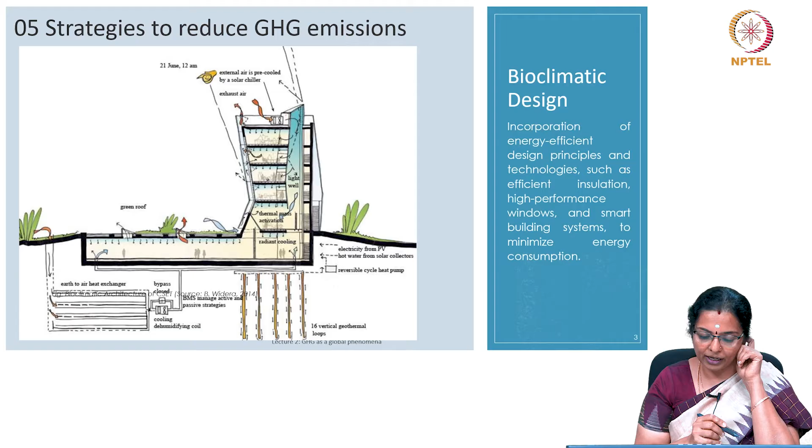One is optimal building orientation. All this we will look at in greater detail later. Natural ventilation. Now let us take the case of this building. If you look at the bioclimatic feature, I have not really projected the orientation, but let us assume that the building is oriented, if this is the building, and then if this is the north, then you can see in this building the western side is very

shorter compared to the north and the south, and we all are aware that radiation along the west is very high. So, if a building is oriented properly, that is what I mean by optimal orientation. Provision for natural ventilation. Here in this building you can see that there is provision for not only natural ventilation but different types in which the ventilation can happen. You have the ventilation along this, you have a shaft

ventilation and so on. Then energy efficient envelope: the design of the envelope itself should be such that the building consumes less energy by virtue of making the indoors comfortable. This approach utilizes many features. One can be orientation, natural ventilation, envelope design to decrease the load on artificial heating and cooling, thereby lowering energy consumption and thereby lowering greenhouse gas emission.

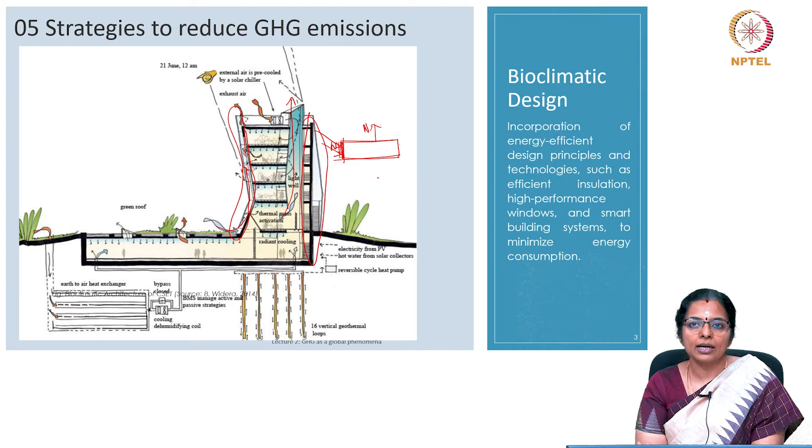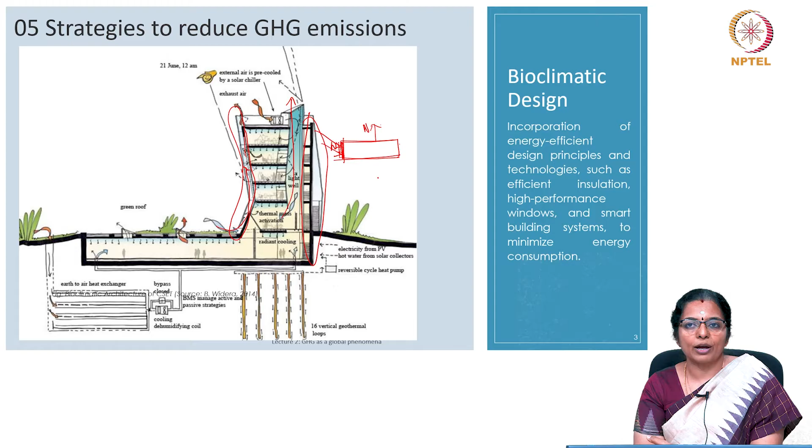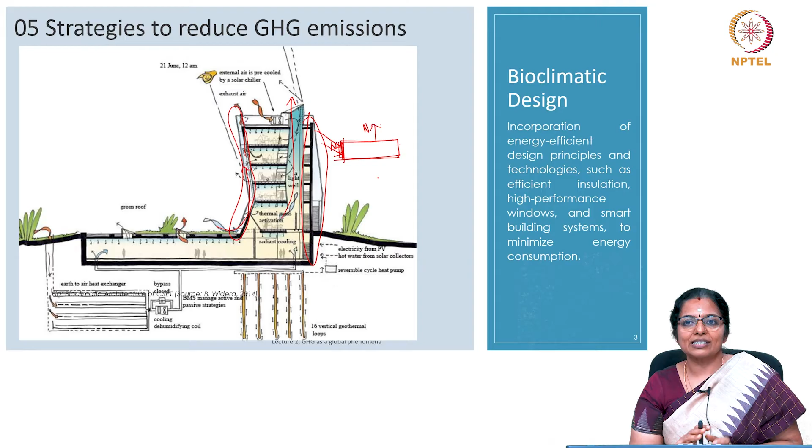Additionally, integration of renewable energy sources like solar panels and wind turbines and other sources of renewable energy, a focus on natural lighting and water conservation practices also enhance the overall environmental sustainability of bioclimatic buildings. In essence, the principles of bioclimatic architecture offer a holistic strategy to create structures that not only prioritize energy efficiency but also contribute substantially to the reduction of greenhouse gas emission.

Now, another strategy that can be used is renewable energy integration. Now, integration of renewable energy can happen in two ways. It can be on-site or off-site. So, renewable energy integration in the building industry involves incorporating sustainable energy sources to power the structure efficiently. Renewable energy integration entails efficient powering of structures by incorporating sustainable sources.

What are the sustainable renewable sources? Solar is one, especially in a tropical country like India. Solar energy is the way to go. Solar panels. We have abundant resources for wind turbines. There are many places in the country where there have been sustained efforts to tap the potential of wind energy.

The on-site clean energy generation reduces reliance on traditional power grids, cutting carbon emissions and promoting environmentally sustainable buildings. The shift not only contributes to a greener and a more sustainable energy mix, but it also aligns itself with global initiatives to combat climate change. Incidentally, that happens.

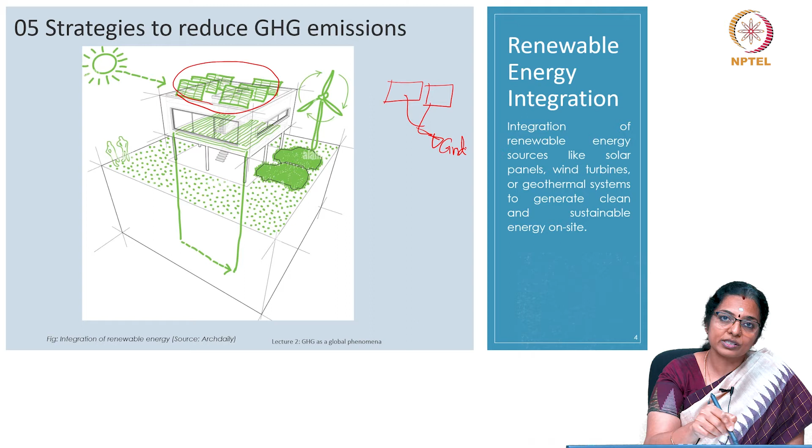So, how can we have this integration? We can have this integration by having solar PVs integrated in the buildings itself. The building itself can host it, or it can be off-site. Off-site meaning there can be solar panels which are not on the site, and the energy that comes from this can be given to the grid, and that energy can be used here in the building. That energy can come back here, or it can remain with the grid also.

That's up to you. Again, wind energy can be off-site. Normally, wind energy is off-site only. It is very difficult to have wind energy on-site, and so on. So, these are the larger strategies.

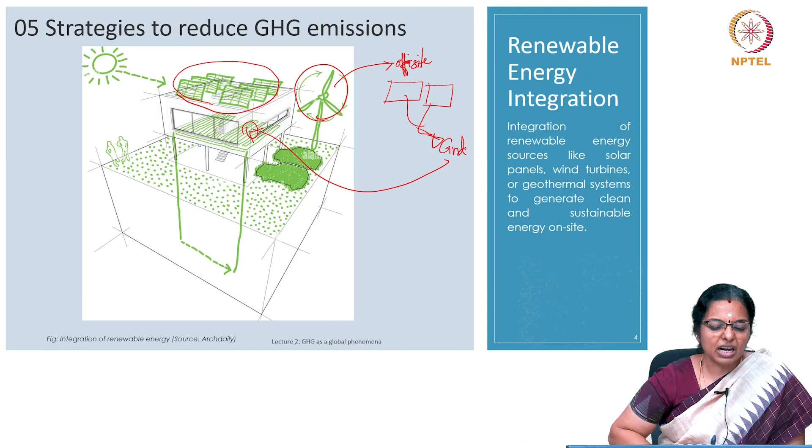Another strategy is trying to get green building certification. There are a number of green building certifications in every country. For India, we follow LEED India, or we also follow what is called GRIHA. So, right now we are having two major certifications. The third could come, which is called the EDGE certification. So, these are largely Indian certifications, LEED India.

At this time, in this class, we are not going to talk of certification, and therefore I am not speaking more on this. But we could have LEED India, GRIHA, EDGE. These are Indian based. All the other things that I am quoting here like BREEAM, CASBEE, there is Passive House, they are all adapted in Europe and the US.

So, of all the categories in all of these green building certifications, every building has to score certain points in some or many of the criteria. So, almost 30 to 35% of the points in any rating system is attributed to energy efficiency. So, it is found that energy efficiency consists of 30 to 35, normally we will keep it as 32% of all the points available on average for the rating systems

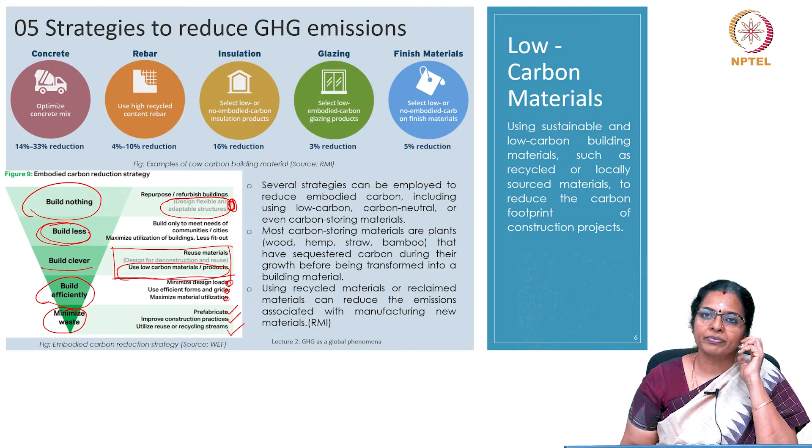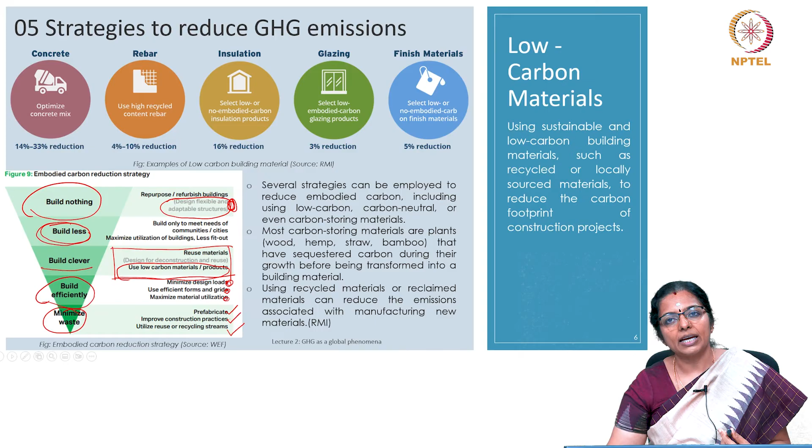GHGs. Glazing, select low embodied carbon glazing products. This can cause a reduction of even up to 3%. Finish materials. So, select low or no embodied carbon finish materials. The kind of carpet, what do you use for carpet? If you are going to have more organic elements in the carpet, it is going to be low carbon, and if you are going to have synthetic materials, the embodied carbon is going to be very high. More embodied carbon, more GHG emission.

The next strategy is the measurement of GHG's impact, which is determined through global warming potential, as we already discussed, and it is expressed in carbon dioxide equivalent. That also we have already seen. Assessing a product's embodied carbon involves a life cycle assessment. What is life cycle assessment? We are going to look at it in great detail, but this life cycle carbon assessment analyzes environmental impacts at each stage of the product's life cycle.

The disclosure of LCA, which is life cycle assessment, results is through environmental product declarations, which are called EPDs, and it offers consumers valuable insights into the environmental footprint of building products. Conducting life cycle assessment also helps us in evaluating a building's environmental impact from the cradle of the building to its demolition, and it considers factors like materials, energy, and end of life disposal.

So, you are not looking at building as a momentary product. You are looking at the consumption of carbon or the emission of GHG right from the raw material production phase, which is nothing but how do you extract the raw material for a particular product, and what all carbon emissions happen at that time.

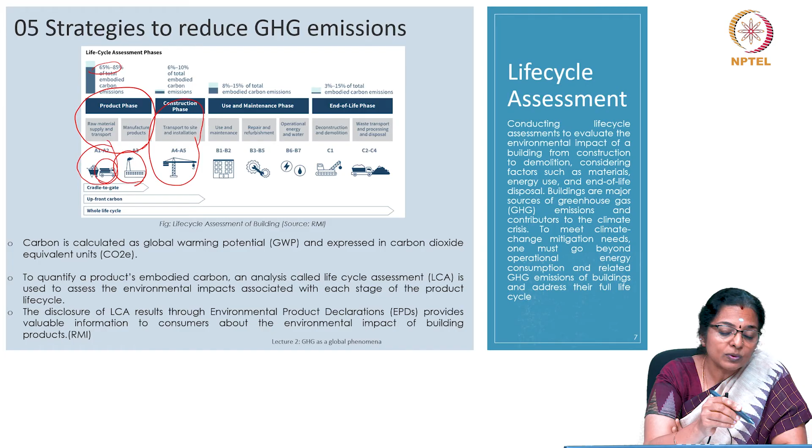How do you extract it? How do you load it onto the transport system? What is the mode of transport that you use? What is the manufacturing technology that you use? During the construction phase, how do you transport it to the site for installation? For example, in the production phase, between 65 to 85% of the total embodied carbon emission can happen at the production phase itself.

Now, reserve the word embodied carbon emission because we are going to look at it in greater detail in the forthcoming classes. Just understand that embodied carbon emission has got a direct relationship to greenhouse gas emission. So, sometimes up to 85% emission can happen at this stage itself, and about 6 to 10, or I would even say 15% can happen at the stage of construction.

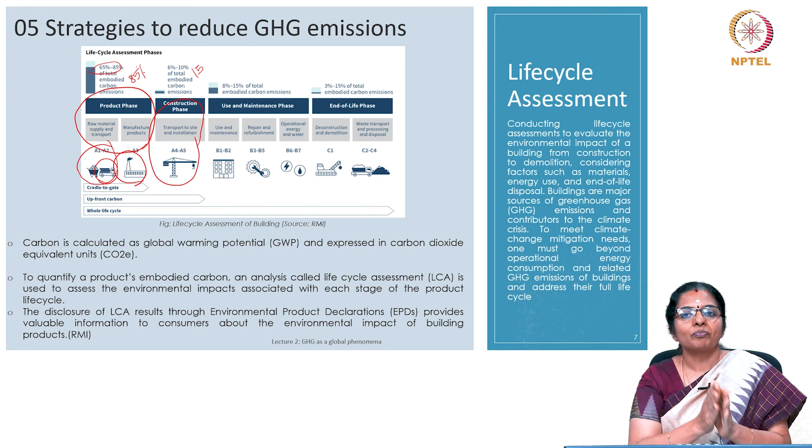Use and maintenance phase is another. There again 8 to 15% of embodied carbon can get emitted. Then 3 to 15% can be during its demolition phase. So, all this comprises the phases of construction, and at each of these phases there is going to be a carbon emission. So, we can just go through what is carbon equivalent.

So, carbon is calculated as a global warming potential, which we already saw last class. It is called GWP, and it is expressed as carbon dioxide equivalent units, CO2e, because you will come across this word quite frequently in the subsequent classes. To quantify a product's embodied carbon, an analysis called life cycle assessment is used to assess the environmental impacts associated with each stage of the product. We will look at it in greater detail in the forthcoming classes, and we will not hurry up for it now.

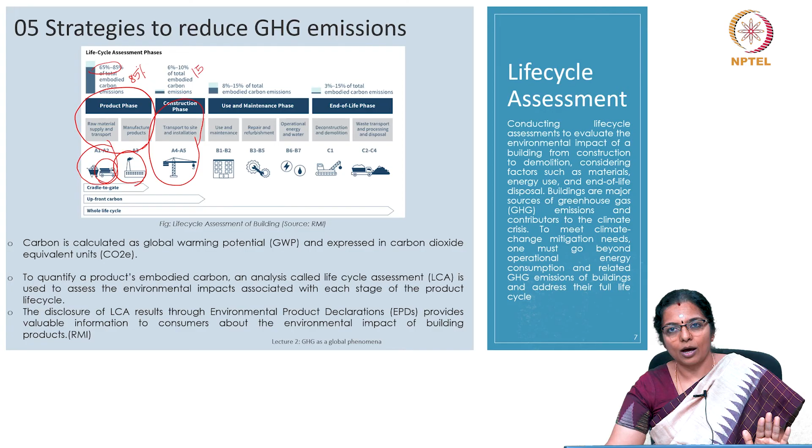The next strategy: in order to reduce greenhouse gas emission, we can use energy efficient technologies. Now, the building industry is increasingly integrating energy efficient technology to enhance sustainability and reduce environmental impact, but the percentage of buildings is still very less. We need to incorporate it in a very accelerated manner and at a fast pace.

These technologies encompass a range of innovations including advanced insulation materials, smart building management, having sensors. When somebody enters the room, the lights get switched on. So there is a reduction in consumption of electricity, because when somebody is not occupying the room, the lights are not on, and the electricity required to fuel the light is also not there. So smart building management systems, energy efficient lighting solutions, and high performance windows and doors.

Smart sensors and automation play a pivotal role, optimizing energy usage by adjusting heating, cooling and lighting based on real-time occupancy and environmental conditions. So, these advancements not only enhance energy efficiency, but they can significantly cause mitigation in climate change by reducing the emissions in the building sector.

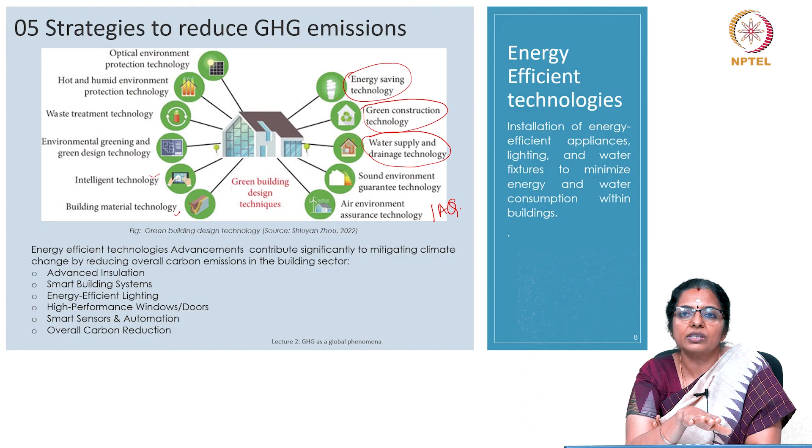It could be either fossil fuel, which is worst, or it could also be green energy in the form of solar and wind turbines. The ultimate aim of the strategies that we are looking at is to reduce the consumption of energy, and therefore reduce the emission of GHG gases. More of this we will continue.